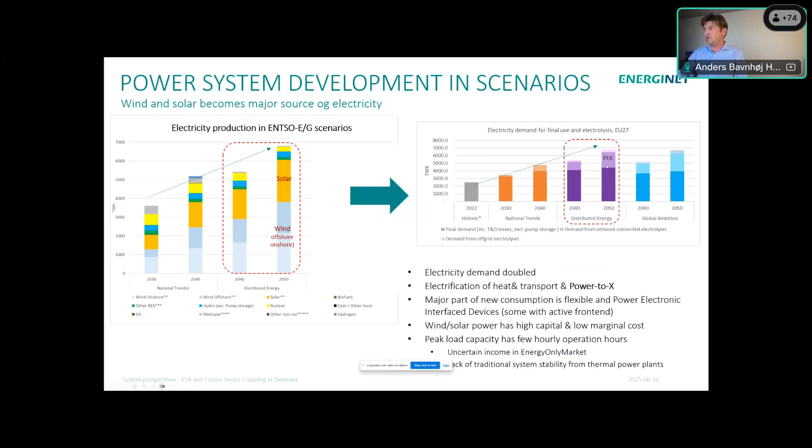You might also see P2X technology here, where you use electrolyzers and electricity to produce hydrogen, and e-fuel is really a focus area for Europe as well. So much more electricity is needed, and this is to be covered largely by offshore wind, onshore wind, and solar. It's a totally different system we're looking into, and P2X at European scale plays a significant role.

This one shows the expected hydrogen demand in the different scenarios, distributed energy and global ambition. It's a significant hydrogen demand, and to a large extent it is to be supplied from electricity, really to reduce the demand for methane and the import of methane in Europe.

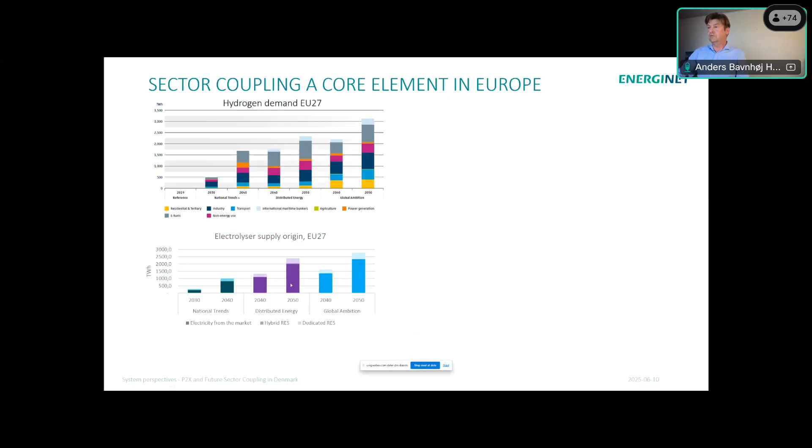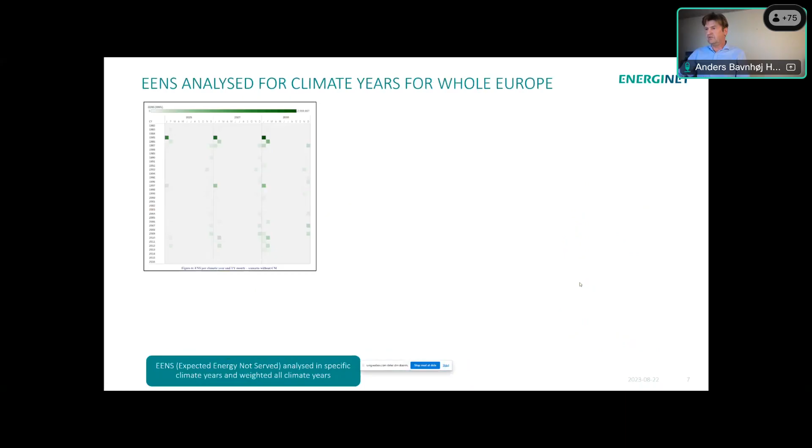One more thing to mention regarding security of supply. For Europe, offshore wind is quite essential, especially offshore wind in the North Sea. But you might have periods, even a number of days, with very low wind in the whole area and low solar. That's Dunkelflaute. This graph shows spots during a number of climate years where these are identified. That really plays a role when we discuss the need for storage capacity, as Eric also mentioned. We need storage capacity for these periods.

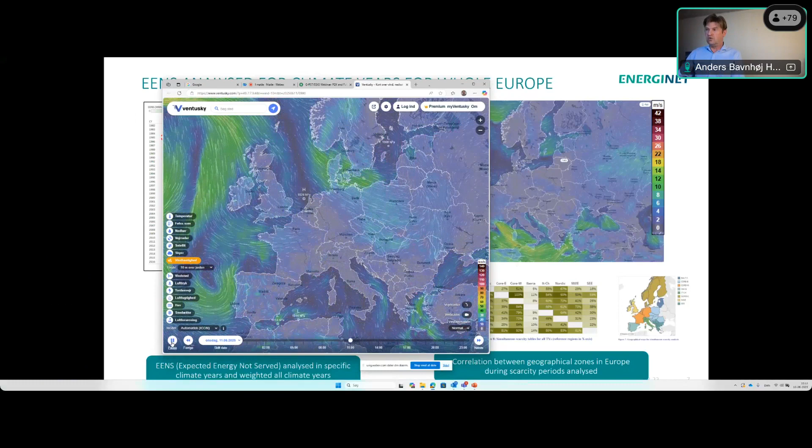I tried to show this, maybe it will work, maybe not. Anyway, this one shows one of these Dunkelflaute periods, where if you go along the timeline, it goes up to more than a week where it's blue in the whole of Europe. There's a lot of wind out here, but we don't have wind turbines out here. So it's really a challenge to handle the system in these Dunkelflaute periods with low wind and low solar.

I'll skip this and come back to this one, because it speaks to the flexibility requirement for the hydrogen system. If you want flexibility for the power system, you need to operate the electrolyzers flexibly, but then you need storage capacity in the hydrogen system. This is the hourly change over a year for one of these scenarios, and this is the accumulated.

So in winter, you might use more hydrogen than you produce. Then in summer, when you have solar and wind at the same time, you charge to refill your hydrogen storage. So that's really part of this system as well, to ensure security of supply.

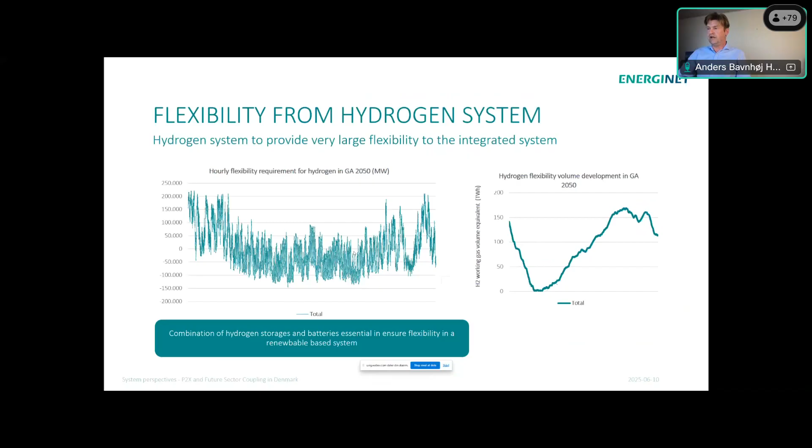If we look into the planning work for the Danish energy system, Denmark has a 2030 reduction target of 70% reduction in climate gas compared to 1990, and it's for the whole economy. For the power system, it's actually 100% green power in 2030. And then 2045, climate neutrality for the whole economy.

And the focus is, of course, the green transition, but security of supply is really top of priority in the work and the planning we do. And of course, it needs to be cost efficient. So it's really optimizing these three parameters to get the most cost efficient climate transition, keeping security of supply and doing it in a cost efficient way.

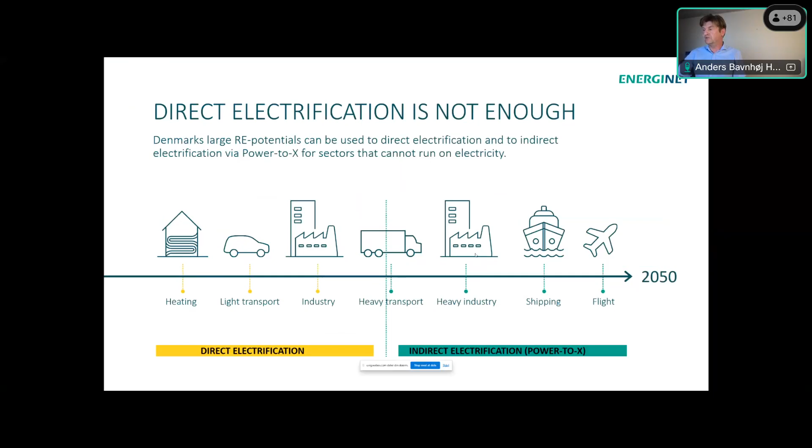If we look a little more on the transition in Denmark, there's a lot of direct electrification, as also mentioned by Eric, with electric vehicles. I think today more than 60% of new vehicle sales are electric, so it's really booming now. Industry also with heat pumps. And when it comes to heavy transport, it's a mixture of electrifying heavy transport but also using fuels produced from hydrogen. I'll come back to this. Heavy industry also needs fuel to make high temperature heat and burning processes. Shipping and aviation as well.

I'm sure most are familiar with this process, but just to take it quite short: you take electricity and water into electrolyzers, and you produce hydrogen as a primary product, but you also have some excess heat and some oxygen relevant for other processes. Then you can use the hydrogen for heavy transport, for refineries, for the steel industry, but also as peak load capacity. We do analyze using gas turbines with hydrogen as peak load, but it's only a very small part that goes back to the power system from hydrogen.

Then producing ammonia to be used for ships, bunker fuels and fertilizers, combined with the nitrogen, but also oil substitutes, you might say. You need to combine it with CO2 or biomass to get the carbon and then produce methanol, jet fuel and gasoline. So those are really essential products, and also chemicals and plastic products.

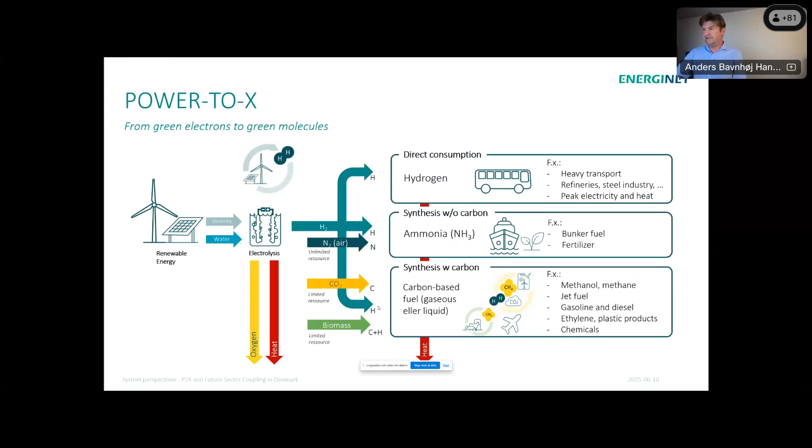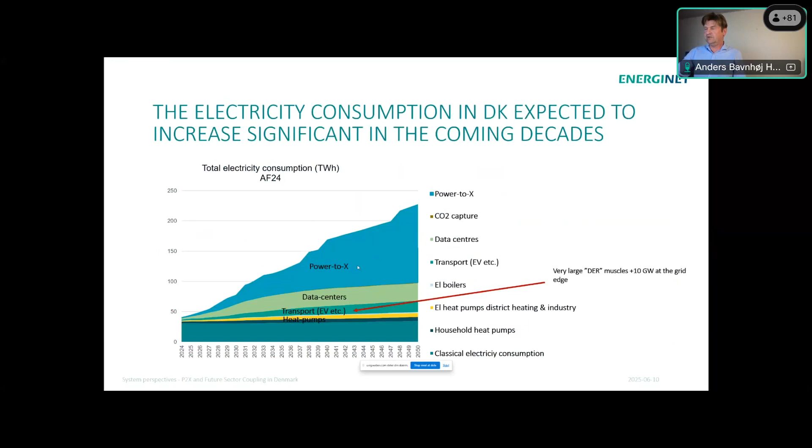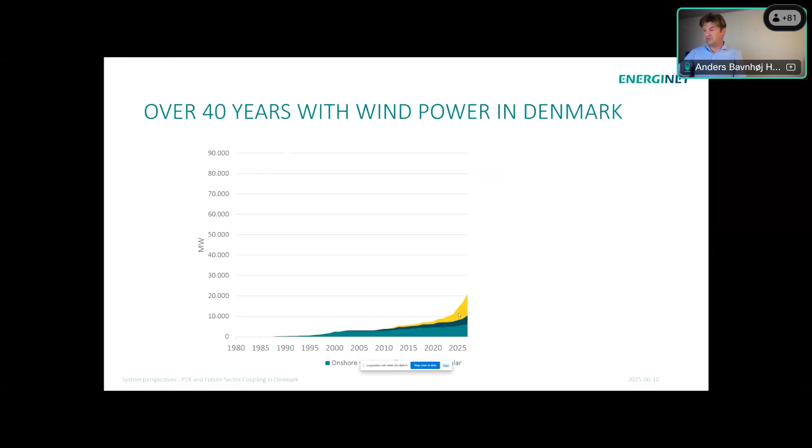In Denmark, we have the significant increase in wind, and now also starting in solar, and we just realize that we haven't seen anything yet, because the capacity, and beware, this is the capacity, not the produced annual energy, for solar and offshore wind is set to increase significantly. So we analyze how we operate this system in our scenario analysis until 2050. We have offshore wind resources in the North Sea, close to Denmark, maybe 3 up to 5 times what we actually need for the full transition of the Danish system. So it's very much producing energy to export to Europe as well.

When we are talking about the offshore area and also P2X in this, what we have really focused on now is offshore production of electricity feeding into shore, and of course feeding into the grid, but also installing electrolyzers at the feed-in zones, so you have the flexibility to switch between using it for electrolyzers or feeding into the grid, to have an even more stable supply of electricity. So that's a key one we're looking much more into.

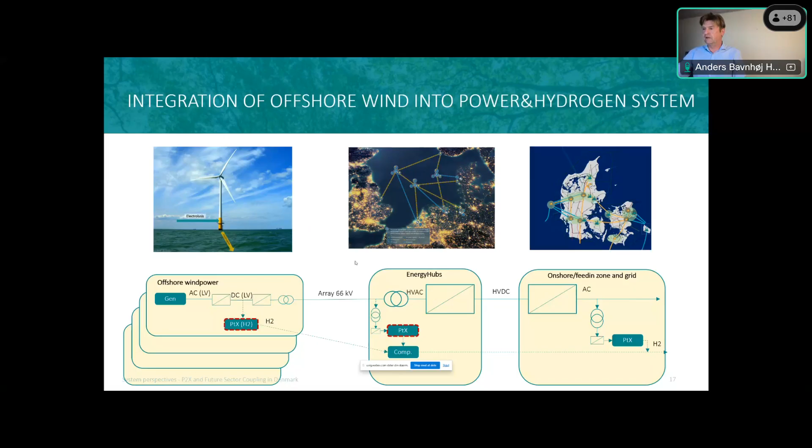But we also look into having offshore hubs with electrolyzers. Where you have these hubs offshore, there could be electrolyzers, but it's more than 10 years ahead. We're looking into these kinds of projects, but it is an issue. And also when it comes to the turbines, hydrogen turbines are being looked at by the developers, so that could be a combination of this as well. Then comes a little nerdy one, when we are discussing the offshore renewables we produce, as just shown here, going into the electricity and potentially offshore hydrogen production.

And this was to show some of the processes being aware. There's a hydrogen grid, and then you might use the hydrogen to produce ammonia for fertilizers and ships, and then you might use the hydrogen to refine, but then you need some CO2, some carbon for refining towards oil substitutes.

That could be from captured CO2 from the CHP plants. That could be from CO2 from the biogas. When you clean the biogas, you get CO2 as well, and you can crack this towards refinery. And also you could take your natural gas and crack this in an electric steam reformer to produce this. So a number of processes actually combined here.

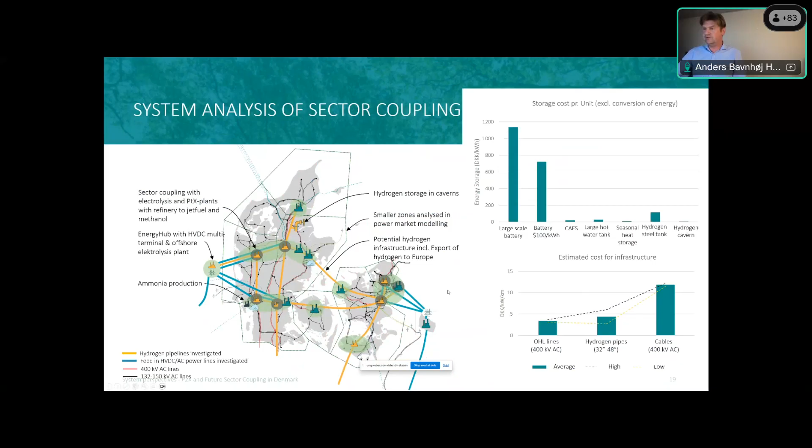And then when it comes to storage cost, we see a lot of batteries to come in Denmark, like everyone does in the system. Large scale batteries are still very good for hourly or maybe into 1 day storage, but when it comes to seasonal storage, the unit cost for storing hydrogen in caverns is very cost efficient compared to batteries. So this is the fast muscle, you might say, for hours storage, and this is for days, weeks, even seasonal balances when we do this optimization of the system.

So we put this into our least cost system optimization model, where we use Balmorel; others might use Plexos, but for our part it's Balmorel we use. We put in these parameters to do the system optimization, and then we give the input of our renewable resources, the way we can invest in grids, and then put in the demand, how much power consumption is expected, or the willingness to pay for power consumption, for methane, for hydrogen demand, and for derived hydrogen fuels.

And then the model does the least cost optimization, you might say co-optimization of hydrogen grid and electricity grid. What's the cost efficient way to build it out, and then also expectations for what the market will invest in heat pumps and P2X plants and CO2 capture, and then of course also the dispatch run.

Yeah, Eric, I think you just interrupt if there's a question related to this, otherwise I'll just continue here. Yeah, I don't see any coming up yet, so okay, I'll just continue.

So when we are talking about this least cost system optimization model, I think it's relevant to touch on other models we use for this system analysis. As mentioned, we use the European TYNDP scenarios as an international framework condition. We have our analysis assumptions for the cost of the power grid, the hydrogen grid and the gas grid. That's the technology data costs here. And then in Balmorel, we do this co-optimization with the representation of the grid.

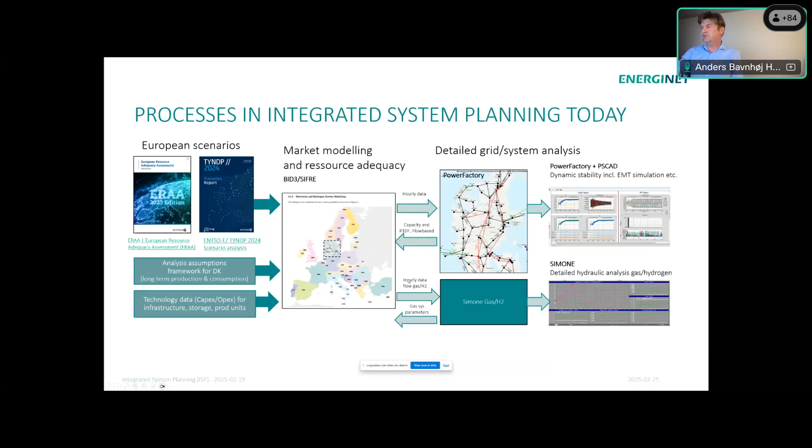And for more detailed simulation of the grid, we put it into PowerFactory and do some stability analysis in PowerFactory with RMS, but also in PSCAD with EMT simulation. So this is, you might say, the linear process in this optimization. But also when it comes to the flow for the gas and for the hydrogen, we use hydraulic analysis in the SIMONE program. So that's, you might say, integrated these processes, but we're looking into more integration of these packages.

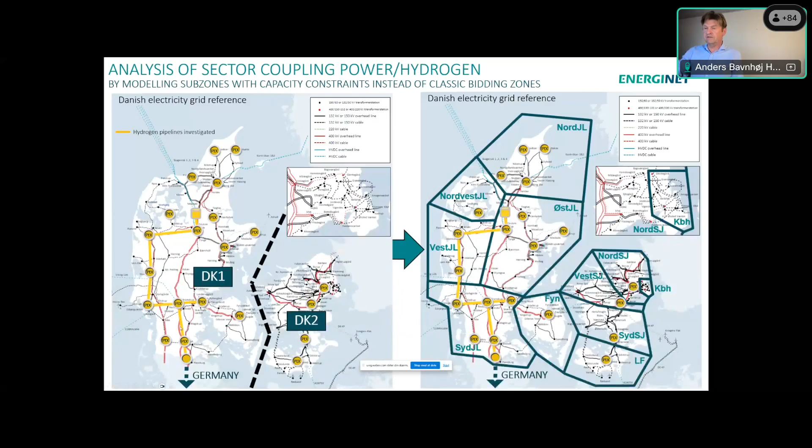So just to finalize about our hydrogen grid. So now we are actually in the situation to look further at investment in this first part of this hydrogen grid and learn more on this. This one is actually a

2050 example showing a hydrogen grid, and this simulates the hourly variation during one year where we use storage in these caverns. And this is a Sankey diagram showing power going to different consumption, but also, as you might see, a lot of the power actually going to hydrogen. This is an annual Sankey diagram with hydrogen going to industry, transport and export.

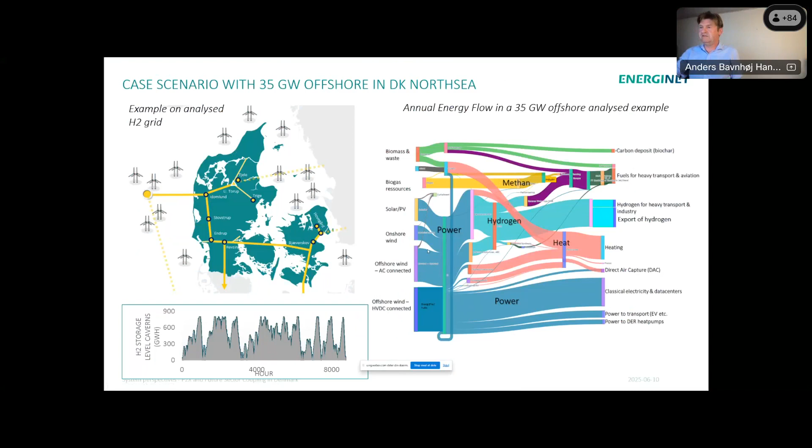And then also, as mentioned, you combine this hydrogen with sources of carbon to produce oil substitutes. So it works together, and it's all about doing it the most cost-efficient way. Then when we look into these scenarios, of course, in the hour and even in operation, 15-minute operation units, we're looking into much more imbalances due to much more wind and solar.

Then of course the congestion in the grid, and then another constraint to look into is to ensure we have enough stability in the system, so we are losing much inertia as we have so much wind and solar running most times, so there's no operation in many hours for the central power plants delivering traditional inertia.

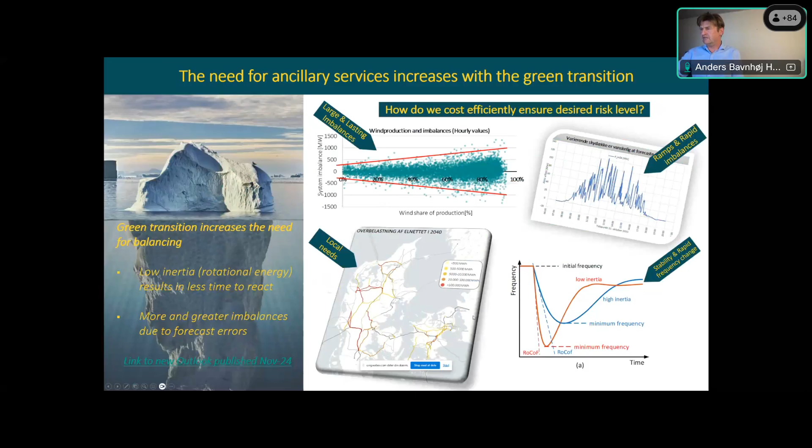So synthetic inertia from wind, solar, from batteries, and also some of the ancillary services to be delivered from electrolyzers, potentially combined with batteries, is a huge source of, you might say, flexibility. And I try to show this in the next one here.

So this one is a duration curve, and actually a 35 gigawatt offshore wind in the North Sea scenario. So this is the wind and solar, and the yellow one here showing the flexible consumption. I'm not sure if it works with this. Maybe this one. Anyway, this is the flexible consumption. So due to a lot of electrolyzers running, a lot of heat pumps running, a lot of electric vehicles running, there's always a lot of flexible consumption available.

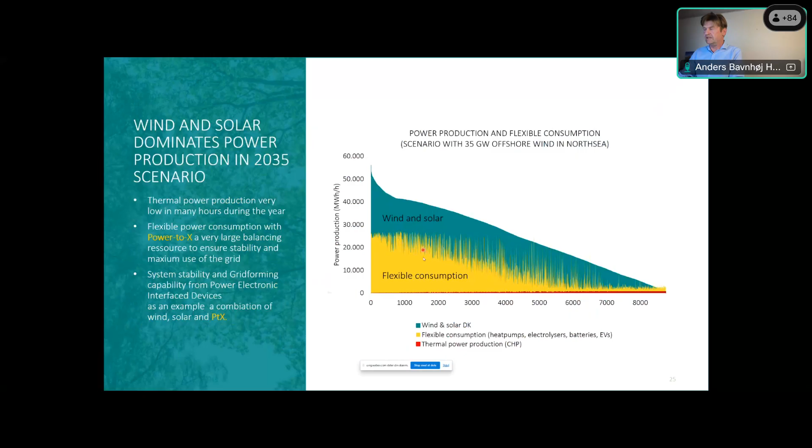Whereas the thermal power production shown here in red is so low compared to all the others, and most of this is something running like waste incineration most times. So it's really wind and solar dominated. And of course, with much more forecast errors in wind and solar, you might say, do we have enough flexible consumption to deliver the needed ancillary services?

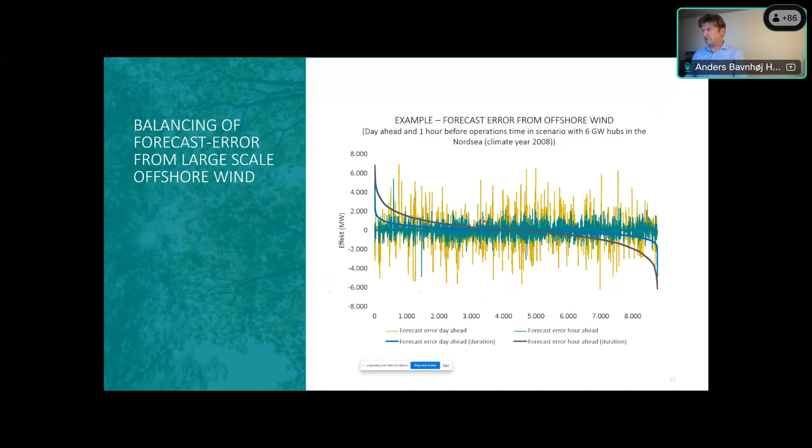So we have from units from the DTU program, the University DTU, some model to forecast, to identify the forecast error day ahead or hour ahead. So this is the forecast error in this scenario. And then we look at the forecast error and try to compare this with the flexible consumption. So at the x-axis, you have the flexible consumption and the forecast error.

And then of course you might have hours where you get more wind than expected. And for security of supply, you can down-regulate this. But then you also have situations with much less wind than expected. But as long as you have flexible consumption to regulate down, you're actually safe. So we have huge access to flexible consumption by these electrolyzers and heat pumps and all.

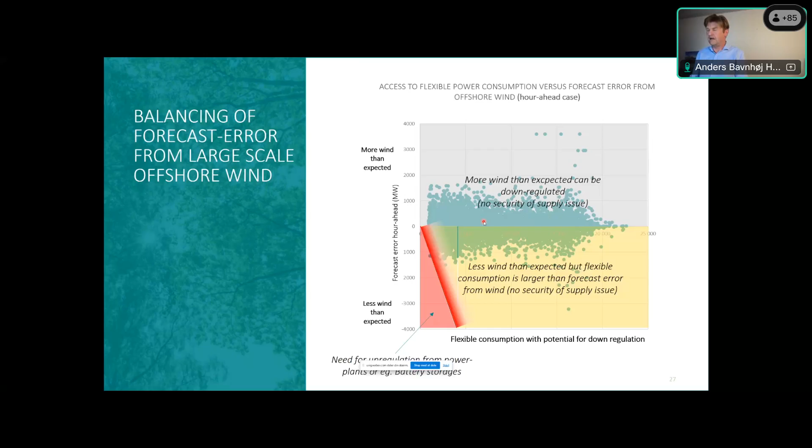And then you have some red shown here where you actually have more forecast errors than you have flexible consumption. Then you need to operate potential thermal power plants to get them ready for running there. And of course, talking into probabilistic analysis, you have to be more safe and have, you might say, large additional resources.

And that leads into the next: I've been talking a lot about planning, but if you look at the system operation of this integrated power, hydrogen and gas system, we do have these forecast errors we have to look into in our optimization. We have to look into stability. Does this operation point we're looking into deliver stability? We might have to look at the hydrogen system as well.

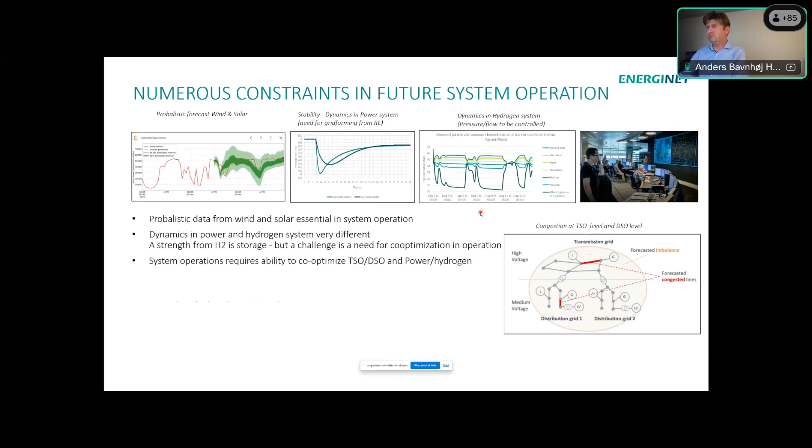So if we look at the pressure of the hydrogen system, you might not be able to regulate your electrolyzers up and down if you are at a low pressure level. So you have to forecast and ensure you optimize your hydrogen operation, of course your wind and your stability, and also all the transmission congestion in the grid, and even now congestion in the distribution grid. So it's actually really quite advanced optimization we're going to look into if you have this co-optimization of the power and gas system.

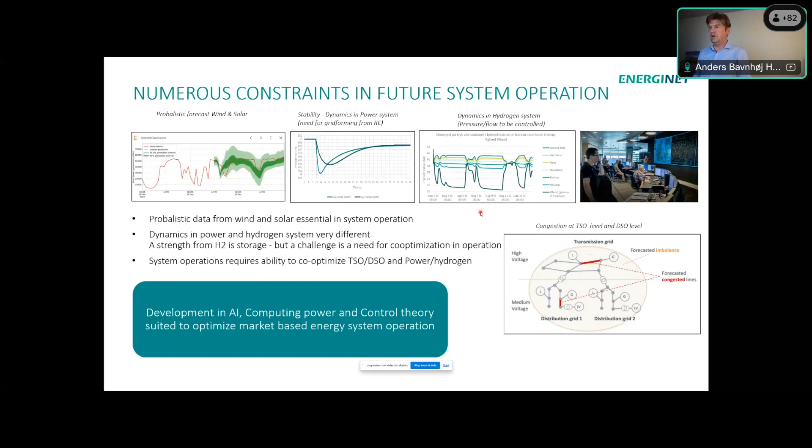And then we also look a little into how could you use more, and it's very much discussed, use of AI and the more computing power and control theory to optimize this. You might use advanced control like model predictive control to optimize so many constraints in a system operation when you look into more energy vectors.

Talking about using AI or machine learning, I'd also like to mention that we do have in our planning studies, of course, a number of scenarios, in this case 1,000 scenarios, and we are starting, instead of always simulating, to really try to use AI machine learning models to see how is the correlation between all these parameters. So you actually have a trained model, so you can say, well, what happens if one parameter changes? How does that influence other parameters? How does it influence the system economy?

So we are starting using these methodologies in these areas, and that actually leads into a discussion on where could we also use these methodologies. And this one is from the University DTU here, where they present and like to discuss and also hear positions on that. If you have a database with maybe a lot of stability analysis, it could be PowerFactory, RMS, or it could be PSCAD and other EMT simulations.

And you actually on all this identify, are they stable or unstable or maybe uncertain? Then you have all these simulations and a trained AI or neural model, and you can use this model to identify or at least screen to see, is this a stable or not a stable situation? And then we're looking much into, could this give us more information about metrics we use in our planning?

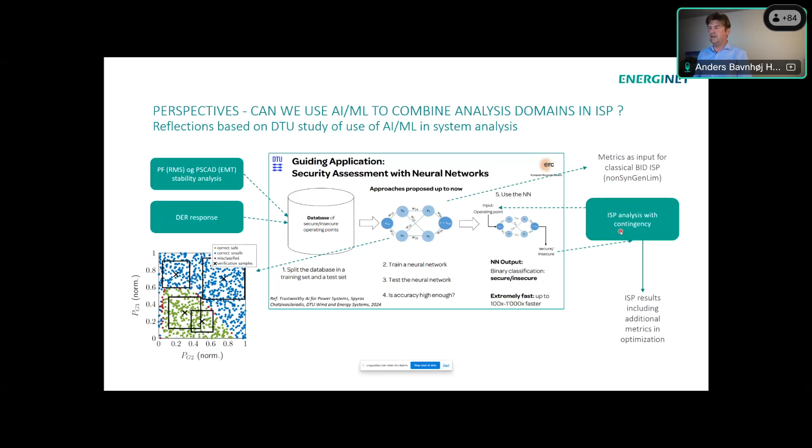Also distributed resources response could be a good way to train and learn response and use this to integrate planning. So I think by this I will start summing up and maybe hope for some questions. There's definitely very high ambitions for renewable energy with electrification and sector coupling. And what we see is that co-optimization of power and hydrogen system in both planning and operation is really a key issue. It highly influences our planning of our power system, but we also see it will highly influence our operational systems. So control centers of the future should plan in for at least an overview of the hydrogen system.

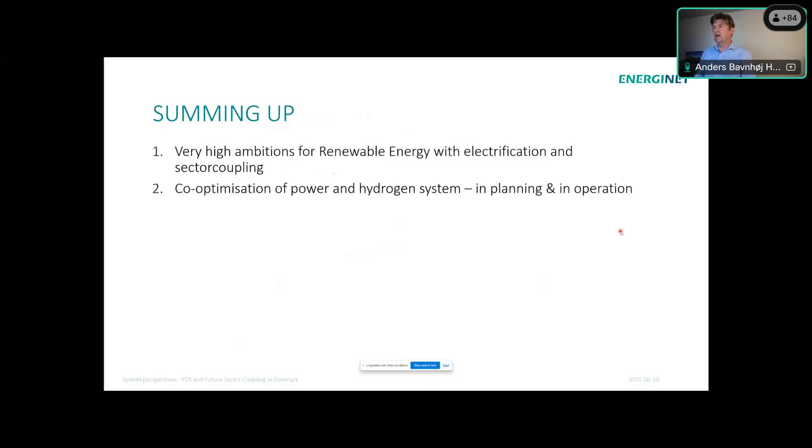Then there's, of course, the congestion management and this tight coupling of market and physics to have values of both central and distributed resources, and also knowing the dynamics for the different systems. That's a new issue to work with. And then we, as point 4, really see computing power, AI, and new control methodologies open this opportunity for a more market-based integrated energy system. And all this calls for some more focused R&D and demonstration of prototypes. So by this, I'll conclude my presentation here, just saying we really see a lot of issues about co-optimization of electricity, hydrogen, and gas systems.

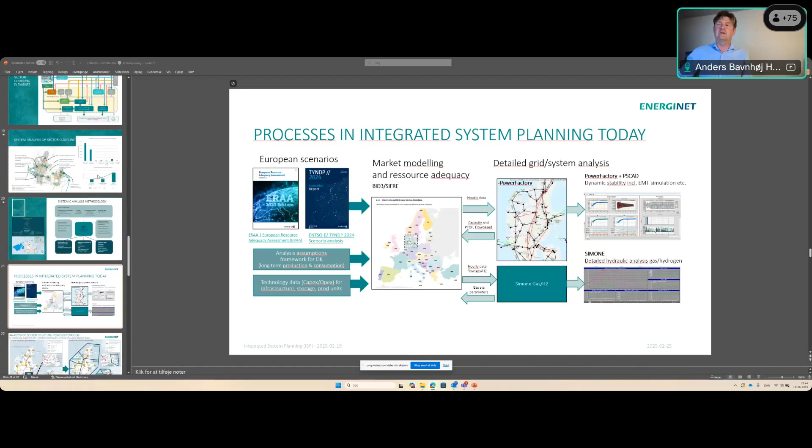Yeah, and really about the cost and the market cost and need for subsidies, I'll come back to this. Just to take shortly the cost for storage, when I showed this graph, if you compare to battery, maybe with $200 per kilowatt hour for this storage. When it's stored in a cavern, that's much cheaper. It's really significantly below even $1 per kilowatt hour. So it's much cheaper to store.

But of course, that only makes sense if you have it as hydrogen, because it doesn't work at all to convert to hydrogen, store hydrogen and convert back to electricity. That round cycle efficiency is below 40%, maybe only 30%. So that doesn't work. Maybe I'm sharing here. Yeah, I'm sharing. You can find more detail also in technology data for these costs.

So basically, if you have to go to hydrogen, you want to do the storage on the hydrogen side, but never go the round cycle as hydrogen back to electricity. So that's the storage cost. And then the other really tricky thing is, what is the cost for producing hydrogen compared to the fossil reference?

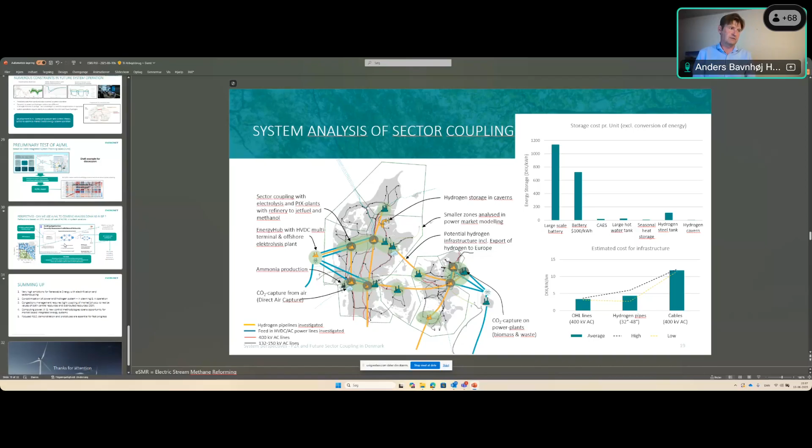So glad to hear the interest in this issue as well. You have the slide here, and I think there's also a link in the slide to the work done at DTU, and I know EPRI is doing good work in this area as well, and you at ESIG have been working on this, and we'll discuss it more. So thanks for the question on this.

I think probably last question. We just have 2 minutes left, but this is an interesting one. As the hydrogen system operator, are there any updates to the control room that would be more focused on the hydrogen aspect, different displays? How would you be monitoring the status across that system, and how does that compare to the existing monitoring systems for the transmission system?

It's still to be worked on much more, because we're now at a stage where we have identified good economy in a hydrogen backbone. There's political agreement on going that way, and we got the obligation to find out what's needed in the control room to operate it, so we can simulate the situation. But it's a very good question. I think there's a lot to be done to understand how we're going to have a control room.